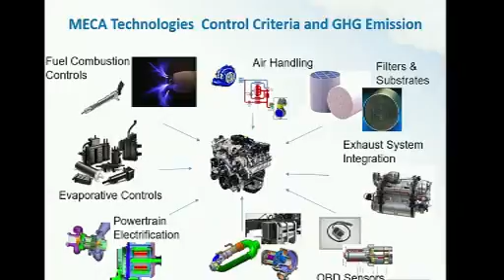Some of the work that's going on, as noted earlier today, is that some of the systems put in place starting in 2010 to get to the current emission standards for NOx used this system that had the SCR and DPF in a series train. It was repackaged pretty early on to get this idea of a one-box type system. And if you look toward the bottom right of this graph, there's a smaller version of that as we start to collapse some of the systems and get to systems that might have some SCR and filter type devices, or even just more efficient catalysts and substrates as we have better manufacturing of those processes.

If you follow that diagram over to the left, this is where we're trying to head for in the 2024 timeframe - a much more compact device with an implementation of an SCR filter, possibly a passive NOx adsorber system up front that also includes a DOC. This has been a natural optimization over the years to get a 60% smaller, 40% lighter system, which saves materials, space, and money, and also helps with thermal management.

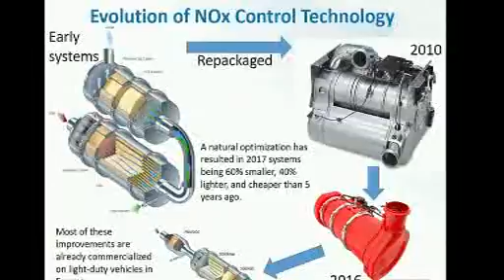This is one of the data compilations we've pulled together over a number of years, looking at what's provided on EPA's certification database. We looked through the systems that have been certified over the last 15 years or so to see what they've been certified to.

In terms of NOx and CO2 emission levels, we had a step change in the early years - it wasn't easy to optimize because systems and engines had to meet a PM standard first, then the NOx standard came later, and CO2 was its own separate set of standards. Trying to do those separately is harder than if you had all the criteria at the same time to optimize engines with all their emission control systems together.

You can see the trend - the open yellow diamonds there are 2017, and those are going down towards the bottom left. The trend shows you're able to get better efficiency, lower CO2 emissions, at the same time as reducing NOx.

In 2017, from a count of 36 diesel engines I saw on the list, there were 11 certified at or below 0.1, which is clearly better than half the standard now. The lowest NOx cert level was as low as 0.05, again for a diesel engine.

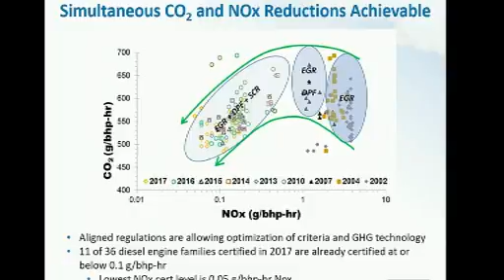So just a few words about the technology demonstration program put together by the California Air Resources Board, funded by them, with a lot of the test program conducted down at Southwest. MECA provided some funding, but also some of the emission control strategies that have been put onto the systems down there. The whole reason for this, as mentioned nicely by Bill earlier...

Their goal is to hit 90% reductions from this sector, basically, trying to meet ozone targets slated to come into effect in 2023 and 2031. These are current ozone standards, not to mention the ozone standards on the books at EPA passed in 2015, which are even lower. There's definitely a need to get to lower NOx from California's standpoint.

Not to mention there are plenty of other states around the country that also have ozone problems. There are states up in the Northeast who have also adopted California standards in order to meet their air quality goals. The target is a 90% reduction from current standards, as said.

0.02 would be the number then, and the solution that was supposed to be put together needs to be consistent with this path toward also not having an impact on climate change aspects or fuel economy, basically. So for CO2, we shouldn't see an increase in other climate pollutants like methane or nitrous oxide.

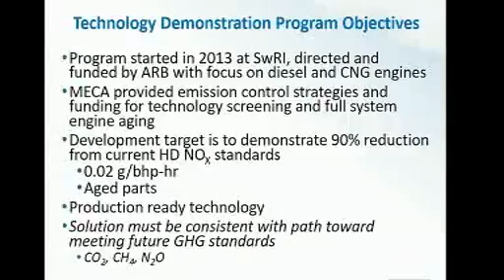The test cycles that were implemented, a majority of the testing, the primary focus was on the current certification cycle, which is the heavy-duty FTP. There was also some testing done on the World WHTC, World Harmonized Test Cycle, and then there's also the RMC-SET, which is commonly used for the line haul sort of steady state certification for a CO2 type standard. And that's for greenhouse gas assessments.

There's also some idling work done. There are additional vocational cycles are also interesting. Of note that ARB is interested in is looking at trying to find what's going on with the low load test cycles to address some of the vocational things, vocational items and vehicles that are operating in the real world, and how to get at low NOx emissions from those in use.

The New York bus cycle was looked at. There's an ARB creep cycle, Orange County Transit Authority cycle. Also, some other low-load work is being done down at Southwest in their Stage 2 element that Bill talked about earlier.

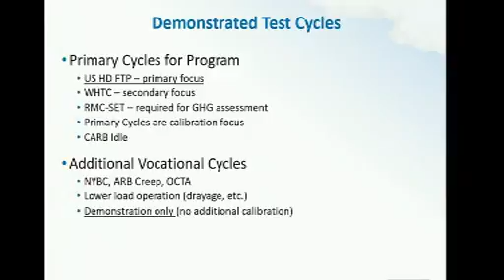So the program engine that was selected for the first part, Stage 1, is the 2014 Volvo, which is a turbo compound engine. It has cooled EGR, DPF, and SCR. You can see the characteristics of the engine on this slide.

Volvo had put this forward as a plan for future engine development, as it has the ability to recoup some of the waste heat in the exhaust, and basically drive another shaft to get mechanical energy from the turbo compound unit. Of course, that also results in some lower temperatures in the exhaust, which we'll discuss in the slide coming up.

The other engine characteristics here are there's no tailpipe ammonia, and the N2O was around 0.05 grams per brake horsepower.

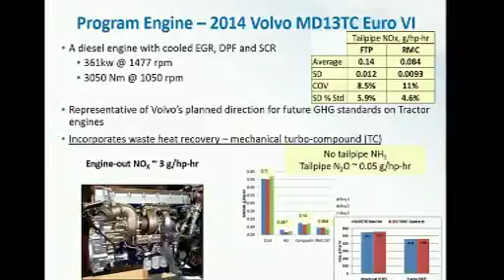As noted, the challenges with this engine are, if you look at an apples to apples comparison from the same model year or same model of engine, from 2011 versus this 2014, you can see that the temperature trace is significantly lower for the 2014 engine when you run it across an FTP cycle, specifically early in the cold start, and it takes a while for it to warm up past around 200 degrees Celsius.

The other challenge with this system is that there was no real way to bypass this and work around it in this current test program. So we, and I think some of the folks who were part of the advisory group, have viewed this as sort of our worst case situation for what the challenge would be to operate an engine and try to get the fastest light off possible, at least for the cold start part of the cycle.

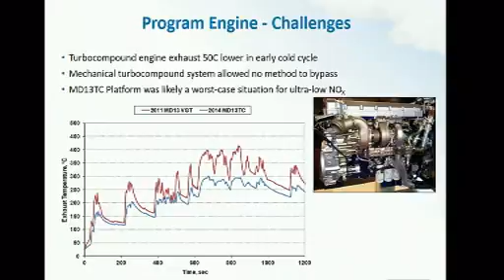So the first step that Southwest spent some time on was to look at recalibration of the engine to get faster temperature heat up at the beginning of the cold start, which is one of the challenges. They modified the existing engine calibration during warm-up, and this would help with the light off of the after-treatment system and get the NOx reduced faster. There's also some modifications that they did to EGR. Some multiple injections were done, intake throttling, and elevating the idle speed in order to get warmer temperatures throughout.

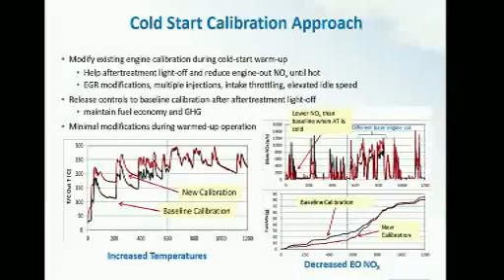So this slide, I just wanted to illustrate that there are a lot of ideas, a lot of potential solutions to this problem of getting to lower NOx emissions out of these engines. We were part of a test program with a defined timeline that said we have to meet these goals, so let's bring a bunch of ideas together and see which ones are most feasible. Ultimately we could only select one because of time constraints and funding. Even though we had a few other promising options, Southwest didn't have time to do the engineering work needed to test some of those.

So you can see here that traditional and advanced approaches were divided. Some involve adding heat, which you can do through a burner or electrically heated catalysts, as just discussed, or through the dosing. You can apply this to either style of approach: the left being what we see in today's systems with a DOC, DPF, and SCR, or the right being passive NOx adsorbers with a DOC in front, maybe SCR in front, SCR on filter, and then possibly a second SCR downstream.

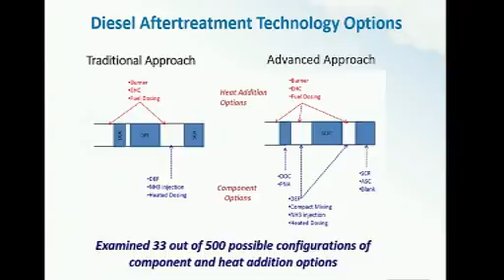So there were a number of ideas put together. The one that was tested, of course, we'll talk a little bit more about.

I think this was one of the charts someone was asking about earlier that Bill might have wanted to show. It shows a lot of the differences between systems, where we can get to, and how many ideas were put out there.

With traditional systems, adding some additional heat, and engine calibration, you can bring emissions down. As I mentioned earlier, we've seen some engines already certified down in this region. When you add low temperature enablers, you get down further, like heated dosing and using ammonia instead of urea. Adding a burner or electrically heated catalyst with supplemental heat gets you even lower. There were quite a few systems around the target range that were looked at toward the end before down-selecting to the final configuration.

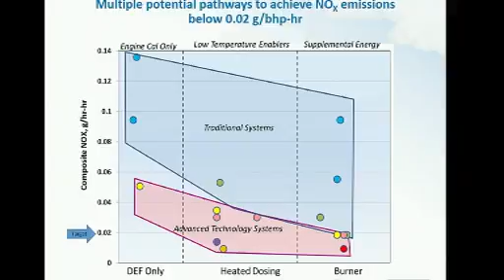This has also been shown in at least two presentations today. The final configuration selected for testing has a passive NOx adsorber with DOC combination, a mini burner that adds supplemental heat as needed when temperature is below a certain threshold, then dosing with diesel exhaust fluid, SCR on filter, SCR, and an ammonia slip catalyst at the end.

Here you can see that when they tested this system, they looked at the cold and hot FTPs with engine-out and tailpipe measurements after testing with development-age parts, as referred to earlier, using the burner system that Southwest uses for their aging.

They got down to really, really low levels across the cold, hot, and composite and RMC-SET cycles. The cold cycle is still one of the higher NOx emitting parts, but for the composite you get down to 0.012, and for the RMC-SET, 0.015.

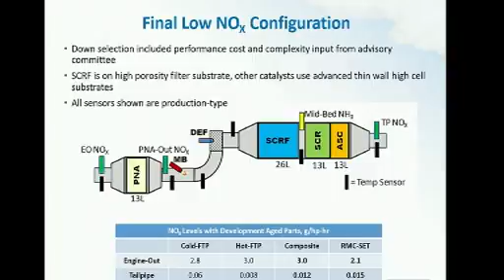Another cycle that was looked at was a vocational cycle, the New York bus cycle. The conclusion here was that when they ran this cycle with the ultra low NOx system, the tailpipe output was very, very much lower, with about an 85% reduction in NOx using this system on a bus cycle.

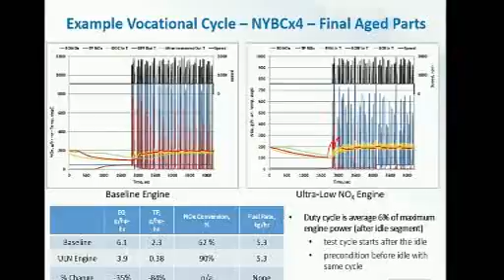I would go over all the lines, but it's all quite muddled up there, other than to show you where the temperature is increased with the added heat, shown in this red line, and that's what provides the ability to get at the lower NOx levels of this configuration. So that's what I'll say about that program.

I also wanted to switch gears and shift into the reasoning for why we see a lot of promise in this area, and why it's not just one solution. It's a number of things all working together to get to this goal.

The first is that substrates are ever increasing in terms of durability, effectiveness, and efficiency. One goal of substrate manufacturers is a more uniform pore distribution. Older substrates had a flatter distribution, mixing bigger and smaller pores, which causes issues with filtration efficiency from the larger pores, while the really small ones make uniform catalyst coating difficult. With a uniform pore size distribution, you get a much better ability to coat and improve efficiency at trapping materials.

This also allows you to downsize the catalyst in volume if you're more efficient, giving you less thermal mass so you can heat it up faster, which is really a key goal of a lot of this work.

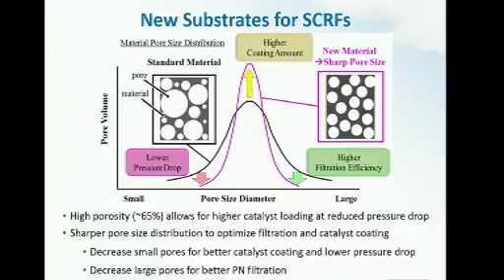Another graph shows that next generation substrates for both DOCs and SCR are reducing back pressure and fuel consumption. Older versions of these substrates have larger wall thicknesses, around 6 mil thickness between the cells, and fewer cells per square inch, which means less coating capability and more back pressure due to the design.

The newer substrates have much thinner walls, better thermal management so you can heat them up faster, and better porosity, meaning less back pressure than standard substrates. The graph illustrates better conversion of hydrocarbons through these more efficient substrates as cell density increases and wall thickness decreases.

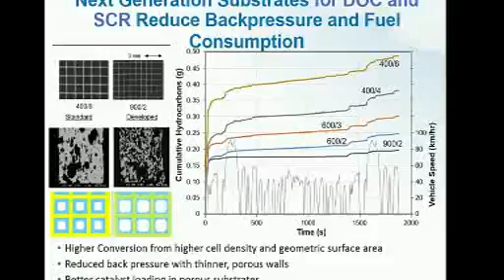This is some work I should caveat - I'm curating a lot of other people's work here, bringing in slides from people doing this research and presenting it.

There's a presentation done by folks funded by DOE at their annual merit review, showing this isn't a stationary point we're looking at. Traditionally people said you need 250 or 200 degrees Celsius for catalyst light-off, but there's ongoing work to get lower temperature catalysts working in this low temperature regime. One example has a goal of reaching a DeNOx target of 90% at 150 degree SCR temperature, showing consistent evolution of the technologies as we move forward.

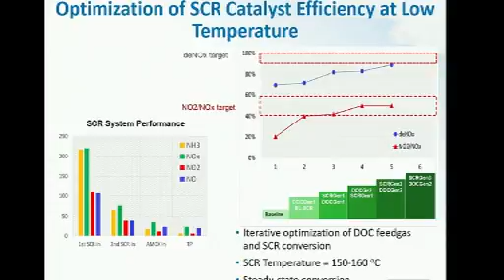Another piece of work presented at SAE World Congress earlier this year looked at SCRFs, with continuous development in this area since it's one of the more promising technologies as we move toward lower NOx. This work showed that if you quickly load these and force regenerations faster than they would normally happen, checking the impact on the catalysts on the SCR on DPF, you see no real degradation.

Presumably, as this is happening, you're also getting accumulation of ash. So the ash accumulation, as you move through more regen cycles, is not causing a reduction in actual performance. The work also showed that after a normal cleaning cycle, they had the same conversion rates afterward.

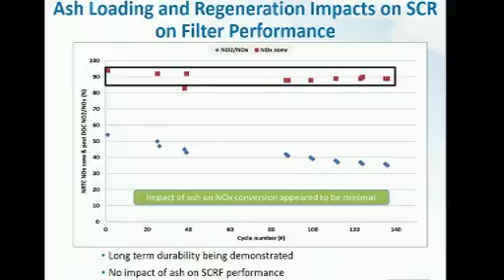This is just a note on the ammonia slip catalysts that are also being continually optimized. This work is really just to show you that there's a higher selectivity towards nitrogen and a lower selectivity towards making N2O at the end of an ammonia slip catalyst. So you obviously want to reduce that and get conversion.

This graph is really just showing you that there's a much higher selectivity of these green, newer versions of these catalysts versus the older ones that were the yellow ones, and that you have lower N2O make.

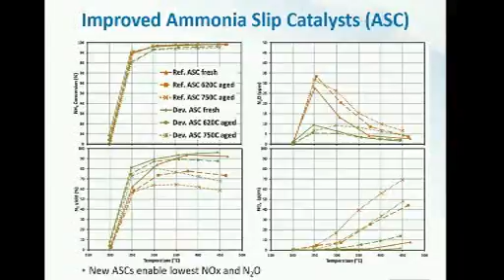I think I'm only getting close to the end here. Make sure I'm not too far behind schedule.

The last couple are really, one of them I noted earlier, is that passive NOx adsorbers is another technology that's been looked at to basically hold on to the NOx early on in the cold start or low temperature part of the cycle, until the temperature heats up to a point where you can release it to the downstream SCR catalyst. These catalysts are working to better separate those and get the temperature where you can hold it just to the point where you can release it all to the downstream SCR, which is this selection here, where storage is working early on, and then the conversion is releasing it later on.

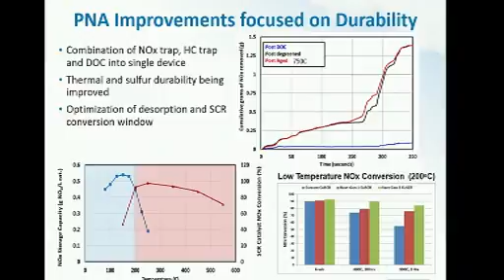Some durability work is being done to show that these can actually last in longer terms, which is really a part that needs to be shown for a lot of these engines as we go to longer useful lives. It's shown down here, that when you age these systems, you can still see that the newest versions of these PNAs are operating almost at the same level, but with much less degradation after aging.

The final idea I'll put out there is that packaging is also an area with a lot of work going on, getting things so that you have less heat loss and better thermal management. As I mentioned earlier, the natural optimization that's been occurring has already given us a lot of that. There's even more being looked at, such as combining some of the dosing into the DOC, shown in this type of device, where you can make things a lot more compact, have faster light-off, and bring the system as close to the heat source as possible.

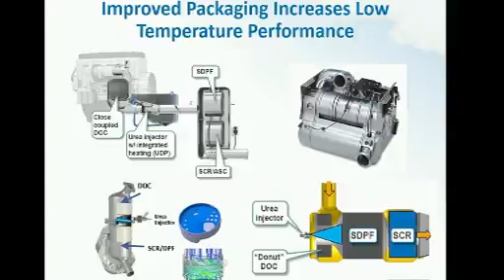So just to summarize, multiple ideas and technology approaches are available to reach the ultra-low NOx levels that were the goals of the program. This engine, of course, has its challenges, being that it's a fairly cold operating engine. As noted earlier, there is another phase or stage that will look at a different engine likely to have a better temperature profile. But there's certainly significant potential to get to much lower NOx levels from all types of engines right now, based on the work that we've seen. So with that, thank you very much.